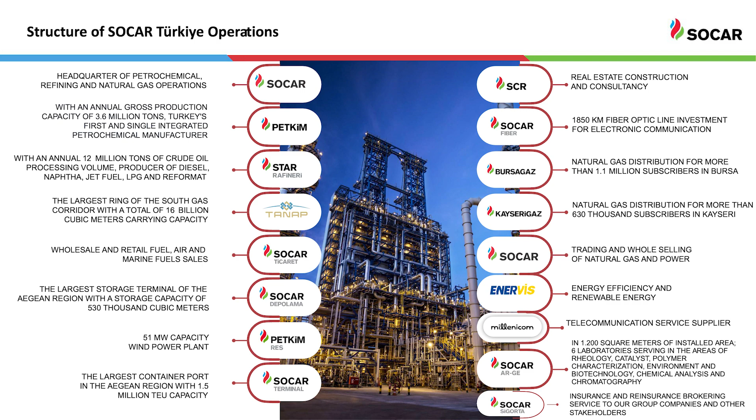I will give you shortly information about the SOCAR Türkiye operation. SOCAR Türkiye belongs to SOCAR, the State Oil Company of the Republic of Azerbaijan. Many investments in Turkey. Firstly, 18 company investments belong to SOCAR. Refinery and petrochemical sites are the largest, and the other largest is the pipeline and gas distribution, very big in Turkey.

Refinery and petrochemical sites are in Turkey in İzmir, Aliağa, the first integrated private energy zone investment in Turkey. You can see İzmir is a very famous city in Turkey. And the petrochemical site is approximately 55 years old. We have a production power of strategic importance to Turkey because it covers 12% of Turkey's capacity needs.

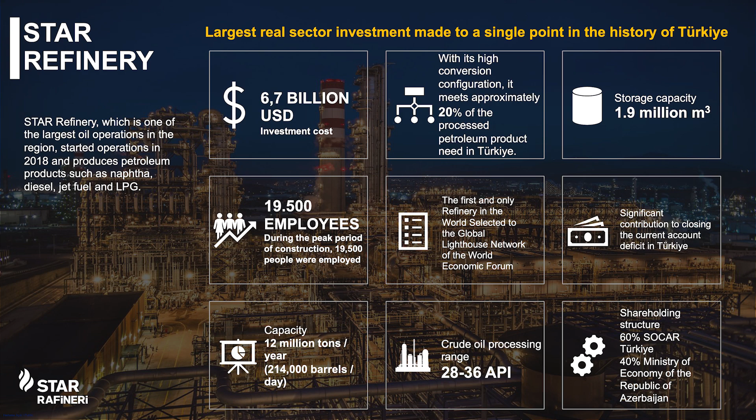After that, the new plant, STAR refinery, is the new plant established approximately 4 years ago. Capacity 12 million tons, a very big company in Turkey. And the other is SOCAR storage. Storage has the largest capacity storage terminal of the Aegean region in Turkey.

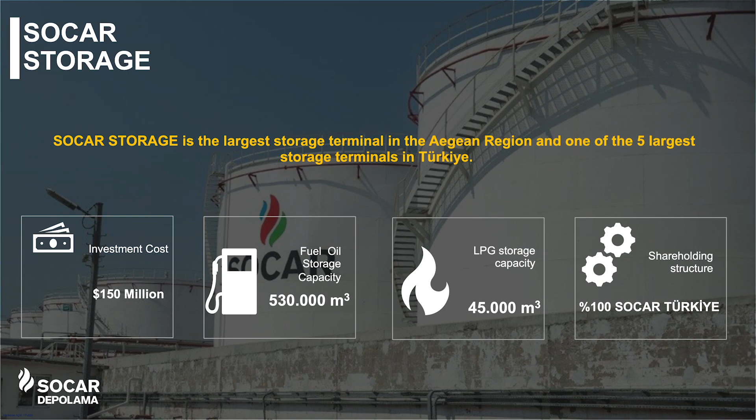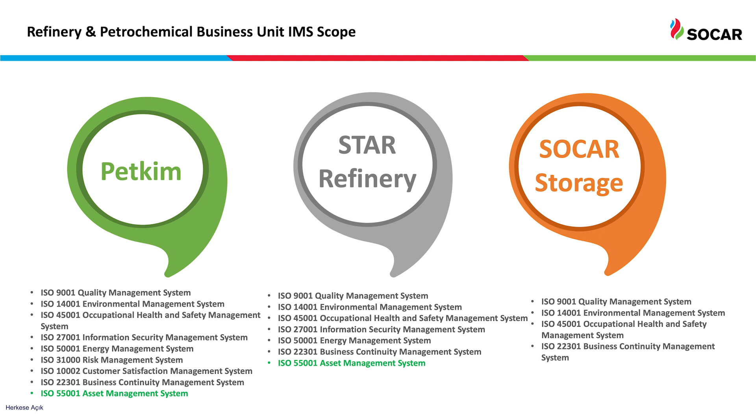For SOCAR Türkiye, quality system is very important. Therefore, you can see a lot of certifications. ISO asset management system, 2 years ago we got this certification.

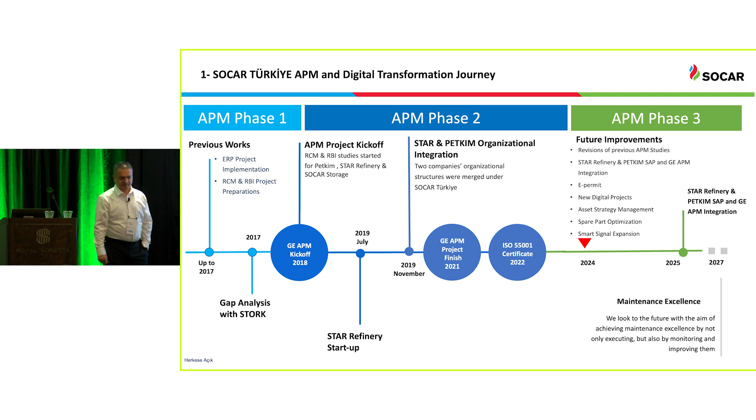Firstly, the transformation journey. The petrochemical site is very experienced, but unfortunately had a traditional maintenance mentality. Years ago, we did a gap analysis with Stork company. Stork, as you know, is a very big consultant company. After that we started the APM project, collaborating with GE and Stork together. STAR refinery started in 2019 in Turkey. After the STAR organizational integration, the refinery and petrochemical integrated the system, because belonging to SOCAR is very beneficial. So after finishing the project, 1 year later, we got ISO certification, very important.

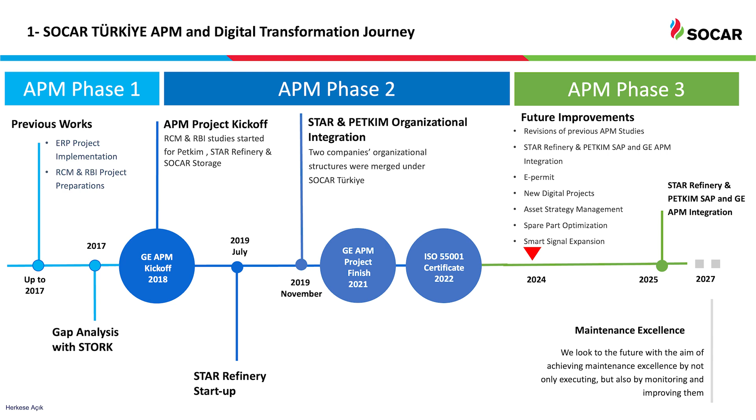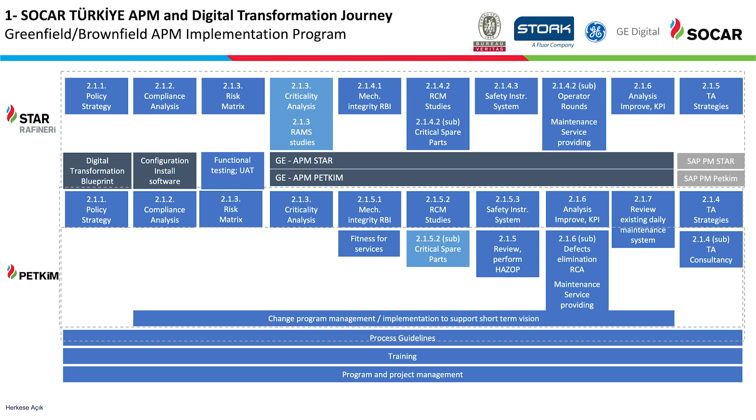APM phase 3 is the other. We started the project e-permit, APM integration this year, a new digital project, we have a lot of investment. Our project topics are generally STAR refinery and petrochemical site. You can see Stork, GE, and Veritas together. We started the project. The project is step by step. Firstly, creating policies, asset strategy, plan.

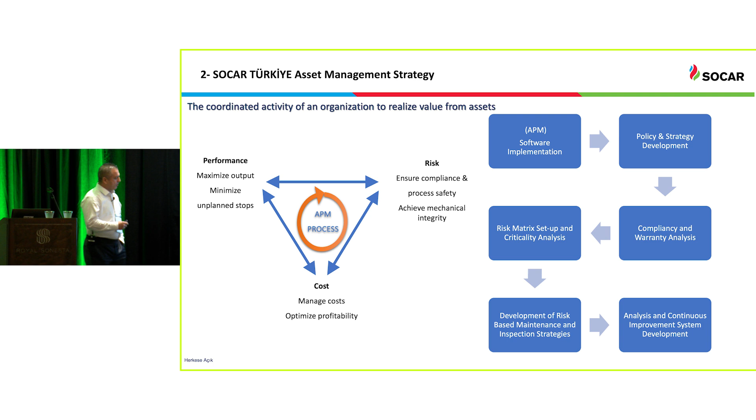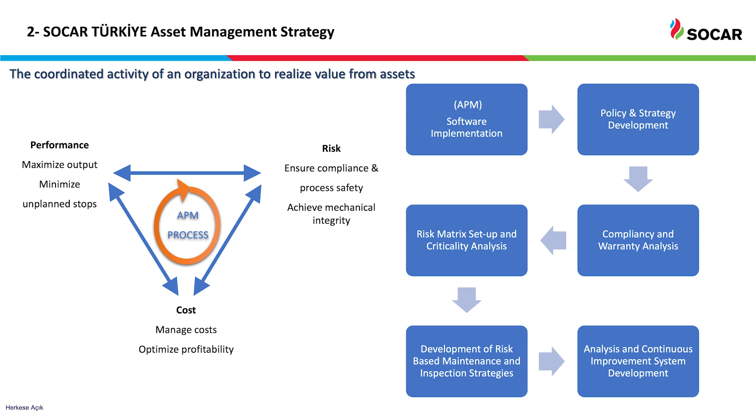The SOCAR asset management strategy is like a triangle, because of performance, risk, cost optimization balance. Very important. So cost is very important, but risk is very important. Performance maximizes output, but risk assessment is very important. This model is the SOCAR Türkiye asset strategy model. Asset strategy model, asset register, all in the SAP system: equipment, specification, all of them in the SAP system.

We started the criticality assessment. Criticality assessment according to compliance, very important regulation, international regulation and governance regulation. For criticality analysis, red is very high, orange is high, yellow is normal, and green is low. After the criticality analysis, for equipment with very high score, we started according to taxonomy type: RBI, safety instrumented system, RCM, different groups per project.

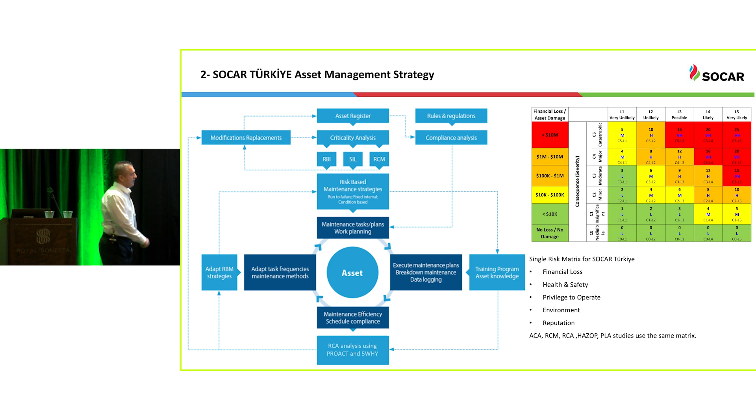After the result of the analysis, maintenance strategy: run to failure, vibration analysis, spare parts management and overall maintenance group. We defined the system. This one is the blue APM system. We use the APM system. After the asset strategy optimization, the asset strategy is implemented in the SAP system: maintenance task plan, working plan. SOCAR Türkiye's aim and purpose is continuous improvement.

So for continuous improvement: PM tasks and execution, maintenance plan and efficiency schedules, KPI and trend monitoring system. Root cause analysis using PROACT or 5 Whys. Plan the maintenance, execute, control with smart KPI monitoring, and act. The SOCAR Türkiye risk matrix has 5 items: financial, HSE, privilege to operate, environment, and reputation.

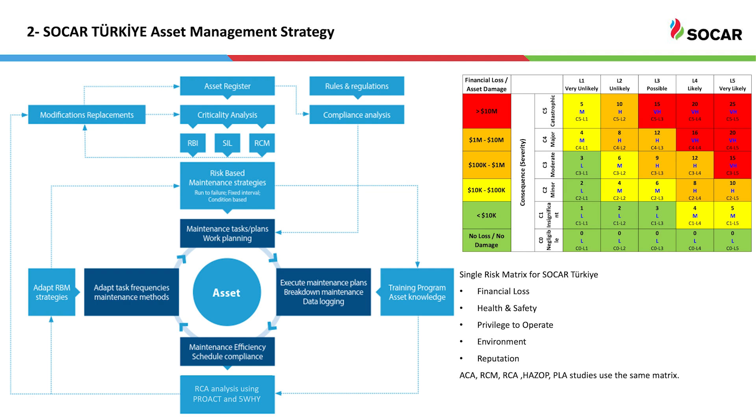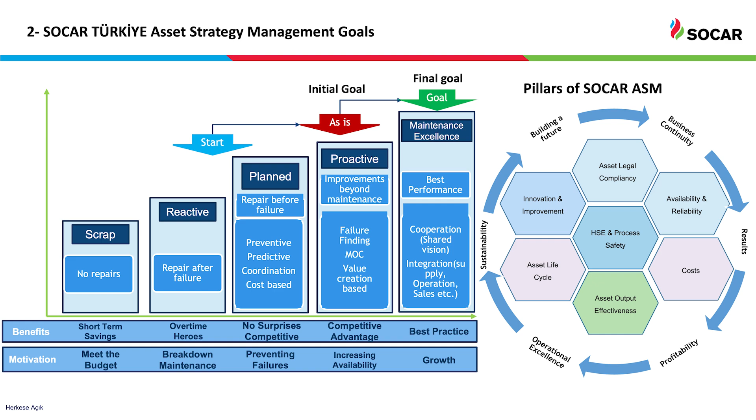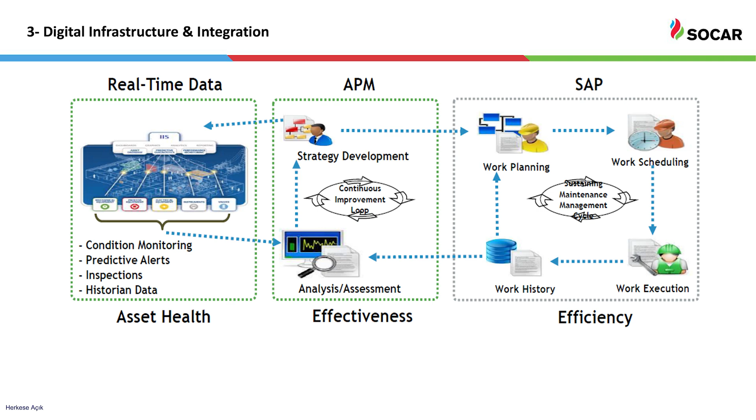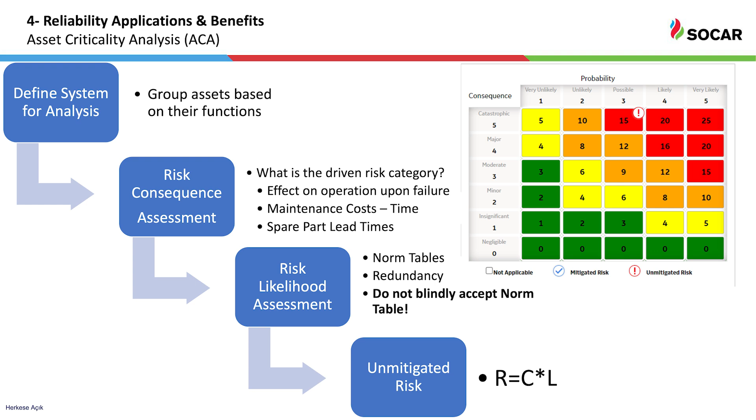A lot of data, a lot of knowledge. We manage it only with a digital system. APM is a very good system for us. This system we use to analyze everything. SAP system is, you know, the SAP system. In addition, other predictive maintenance and historian data integration, all systems with two-way integration. Asset criticality analysis step by step, as you know. After the asset score, the unmitigated risk score, we started the analysis.

Reliability RCM, very important, we started the RCM. Normally, for very high critical equipment a specific maintenance strategy is defined, with a specific period according to mean time between failure and reliability score, optimized care maintenance strategy. For low, it is basically operator rounds, generally done by the operation group. Base care and standard care is the maintenance group's responsibility.

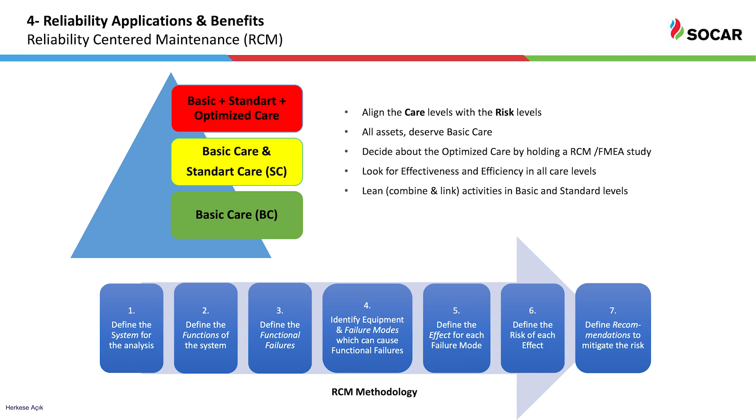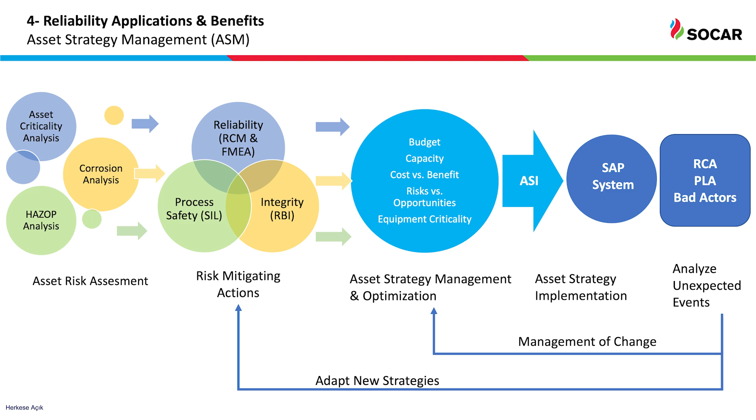This asset strategy workflow, as you know, has a lot of analysis: reliability, process safety, integrity analysis, optimization, and budget, capacity, cost benefit, risk, opportunity, equipment criticality, combined into the maintenance strategy. We defined only one strategy. After the asset strategy is implemented in the SAP system: work orders, PM work orders, root cause analysis, production loss analysis, bad actor analysis, unexpected events.

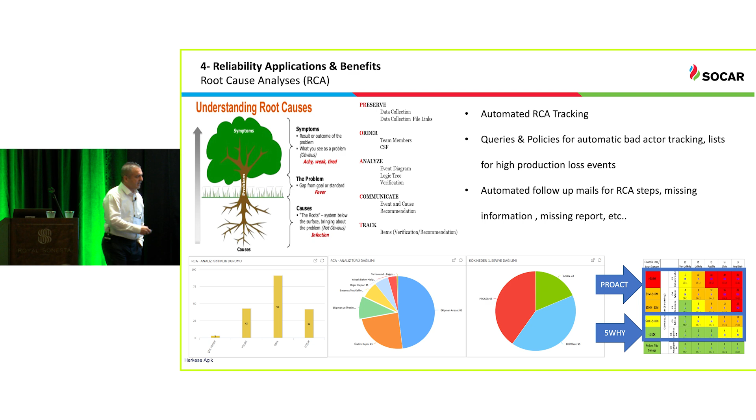For root cause analysis, we use the APM system. Normally, according to our procedure, risk analysis: every event we do the risk analysis, small or big, no difference. So if very high risk, with PROACT method, the responsibility is only the reliability group; moderate, the facilitator is only the reliability group. The other, small bad actors, the root cause responsibility is the maintenance group, operation group, or process group.

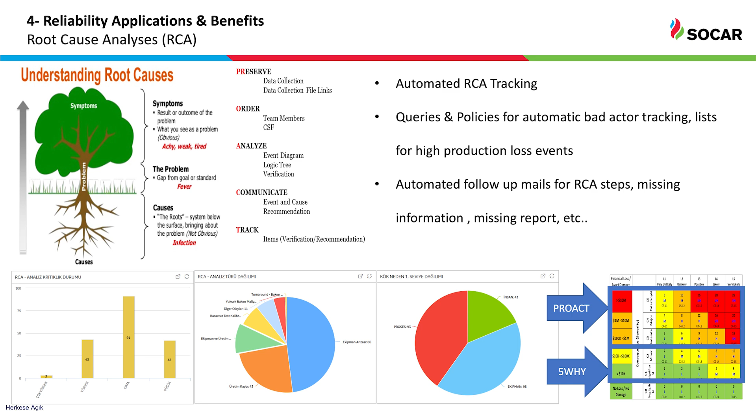Reliability, not only reliability RCM analysis, the other analysis. Sometimes it is the reliability, availability, maintainability, RAM analysis. Yesterday, GE explained the new improved development very well. So the real case: as you know, the integration of the refinery and petrochemical site. The Petkim site has 4 boilers, but 2 boilers working and the 3rd boiler standby.

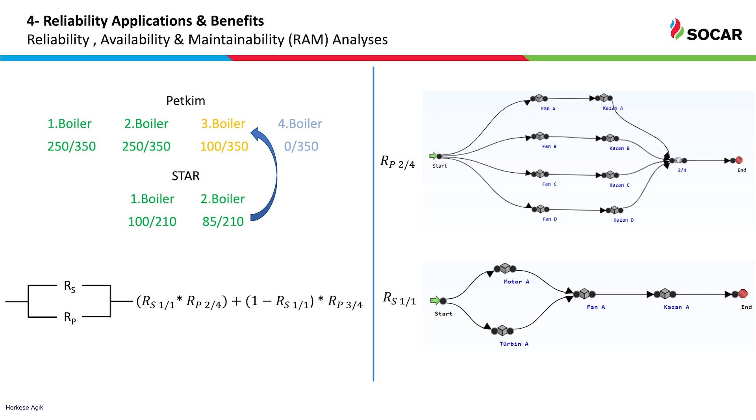The other overall maintenance, generally, mentality. The Star site has 2 boilers. 1 boiler is enough, boiler capacity is enough. The other is standby. So, firstly, reliability analysis. We started the reliability analysis. We used the GE APM solution Meridium.

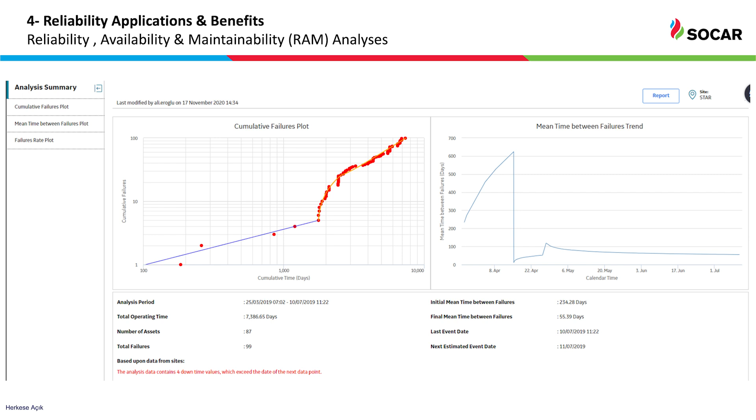Firstly, parallel system. After that we created a new scenario. After the scenario, the system is very good. So 2 boilers are enough, 1 boiler is standby. For the petrochemical site and refinery site, 1 standby is enough. So approximately $2 million per year.

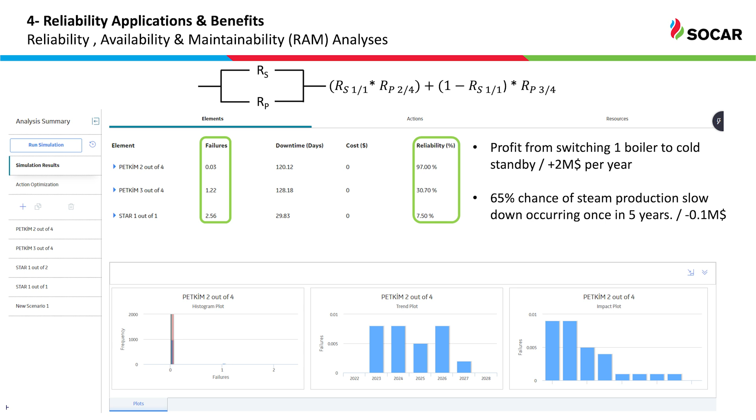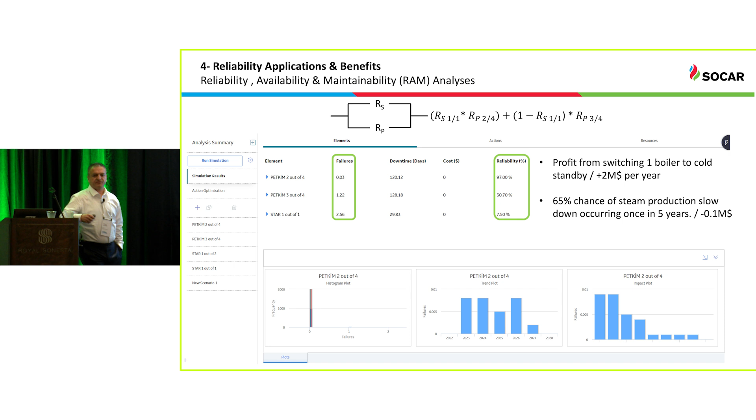This analysis result: at SOCAR, all project risk analysis and budget analysis and cost benefit analysis are done by the SOCAR financial department. If your project is feasible, we start. Asset life cycle cost analysis: we started to improve the asset life. LCC analysis, life cycle cost analysis, is very important.

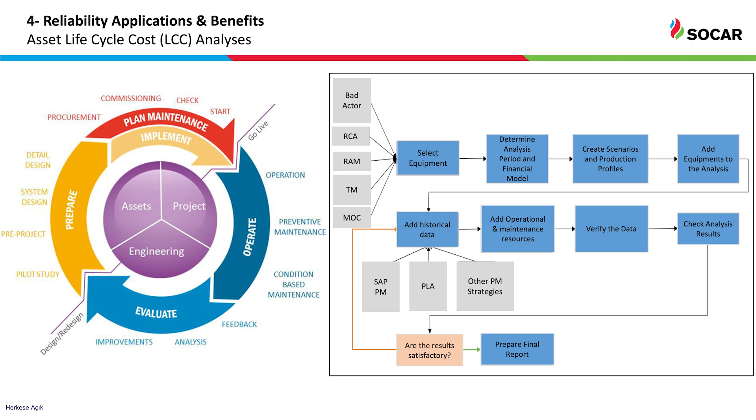As you know, equipment from design to obsolescence, scrap, we monitor the whole process. So we use the APM asset life solution. Our process has a lot of triggers: bad actor, root cause analysis, RAM, thickness monitoring, MOC, a lot of systems. We started the life cycle cost.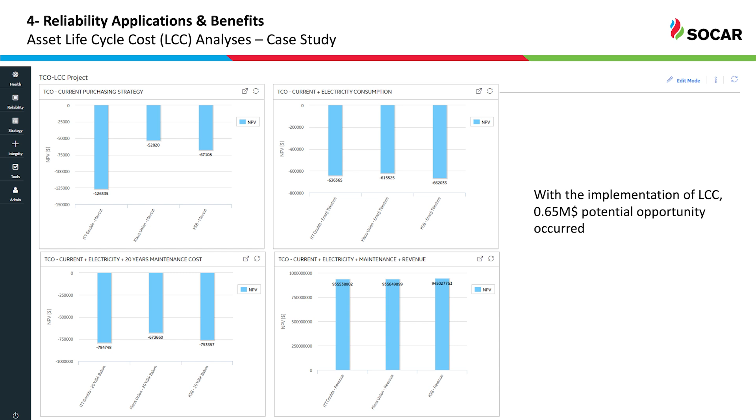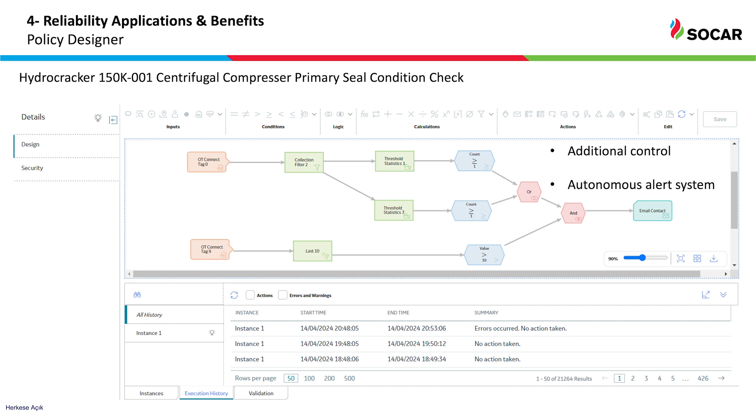Policy designer. Policy designer is not only for the RBI system, but other systems. SOCAR Türkiye uses all policy designer modules. Generally root cause, production loss, a lot of systems. For example, policy designer for the hydrocracker centrifugal compressor seal condition check. Production loss analysis we used; normally SOCAR uses all GE Meridium modules. Production loss analysis is very, very important. If production is lost, it goes directly to the root cause analysis module with the policy.

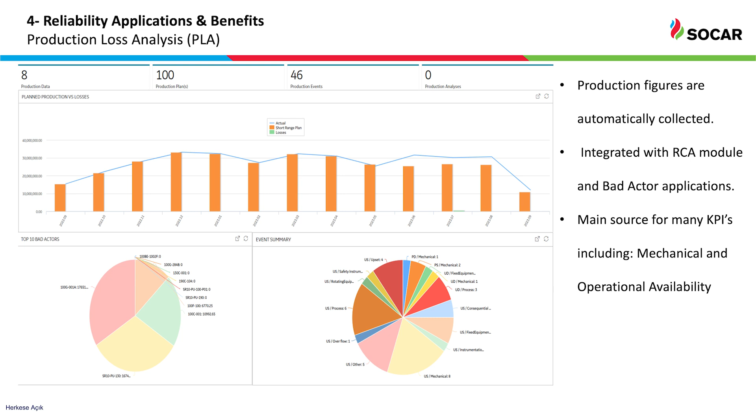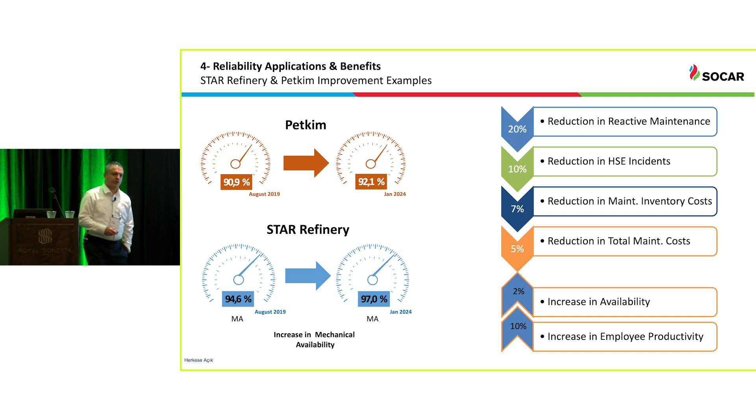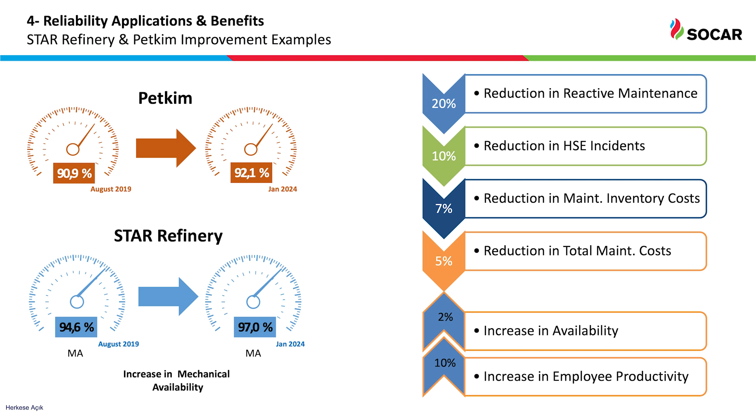APM is very important, but top management asks about the benefit. What is the benefit? Very high cost. But you can see the Petkim site availability, 90.9, 92.1 increase, over 4 years. The same with Star Refinery, 11 capacity, now 13 million capacity. Very high availability. And this one is reactive maintenance reduction, HSE reduction, inventory cost reduction, total maintenance cost reduction, increased availability, increased employee.

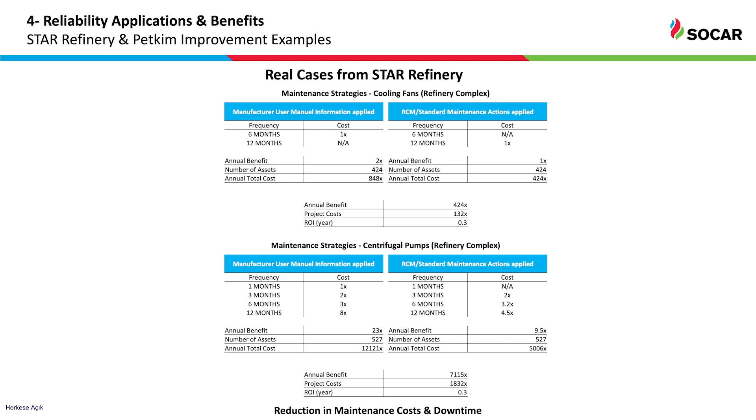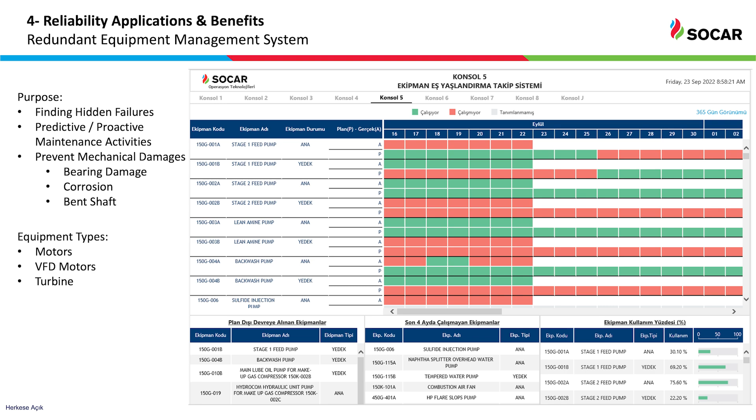Real case: the problem is normally not only the total system, sometimes equipment taxonomy, for example cooling fans and centrifugal pumps. You can see ROI benefit is very, very high. SOCAR Türkiye system designer, the redundant equipment management digital system. As you know, the main pump works 3 months, and the standby pump, according to procedure, 1 month. We check it after the report. They send the email to the responsible operation group or maintenance group: why is the main pump working? Why is standby not working?

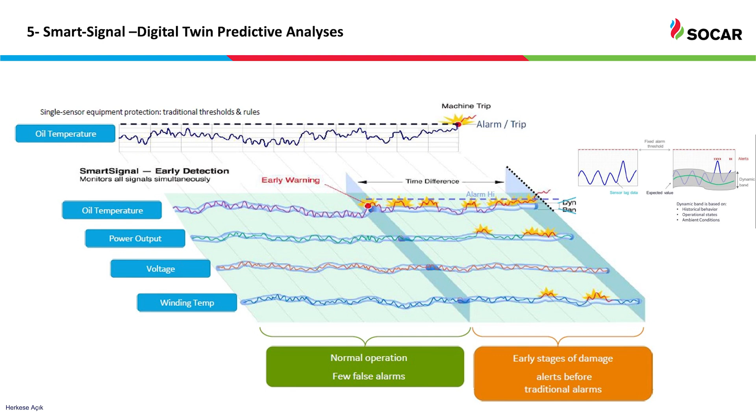Yes, SmartSignal twin. Approximately 2 years ago we started. As you know, yesterday GE very well explained SmartSignal and its improvement development. I think very, very good. We apply it. SOCAR Türkiye is very, very happy with SmartSignal. So we started the pilot with 5 equipment, but from the project benefit cost result, we decided on expansion. The first expansion was 13 pieces of equipment, and after that we expanded to the petrochemical site and other critical equipment.

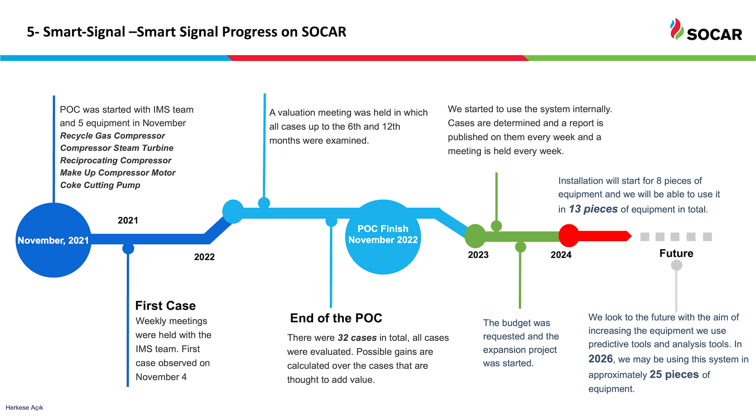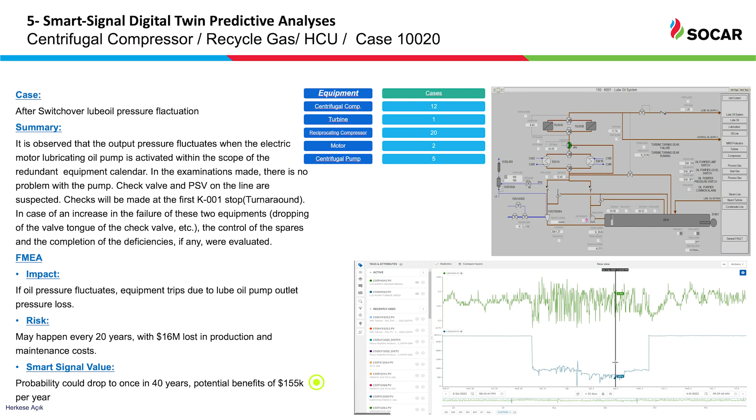You can see SmartSignal coverage, duration, alerts, open cases, meetings. Every alert is evaluated by the predictive maintenance department, and in meetings the operation group, if necessary the project group, and the maintenance group decide together. For example, a very critical centrifugal compressor, very early detection with SmartSignal. So failure mode effect analysis, impact and risk. We calculated the risk. SmartSignal value and potential benefits, you can see, $155,000.

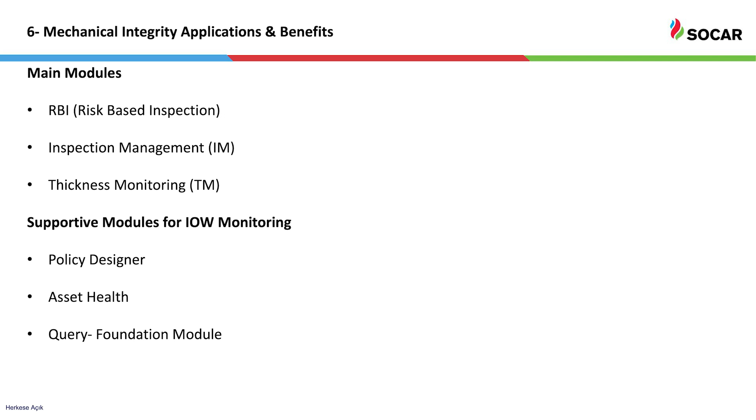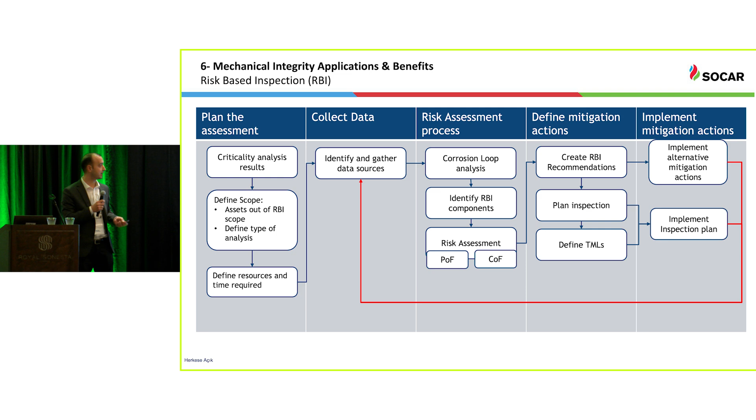Supportive modules for IOW monitoring we also use: policy designer, asset health and query foundation modules in Meridium. Mechanical integrity applications, risk-based inspections: plan assessment, collect data, risk assessment process, define mitigation actions, implement mitigation actions. Criticality analysis results, define scope, define resources and time required, collect data, identify data sources, corrosion analysis, identify RBI components, probability of failure and consequence of failure analysis, create RBI recommendations, define TMLs, implement mitigation actions. This is IOW, and implement inspection plan.

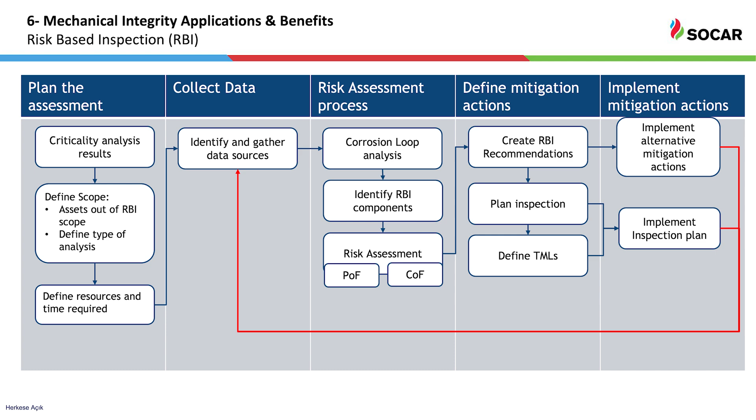This is our example of corrosion loops for the aromatic plant. We draw all of the corrosion loops in the P&ID and PFD, and we save these corrosion loops. If needed, we revise them.

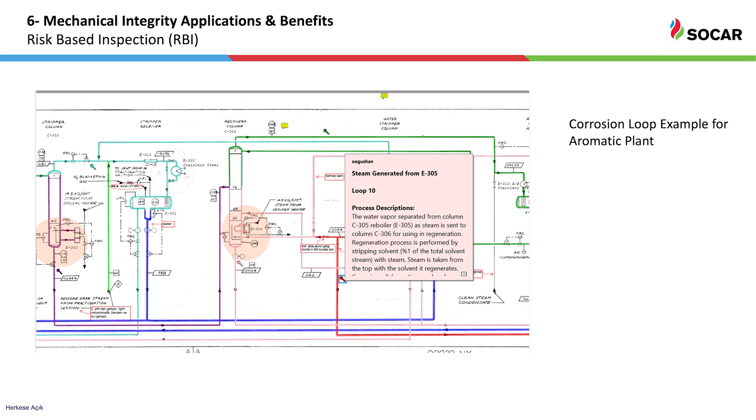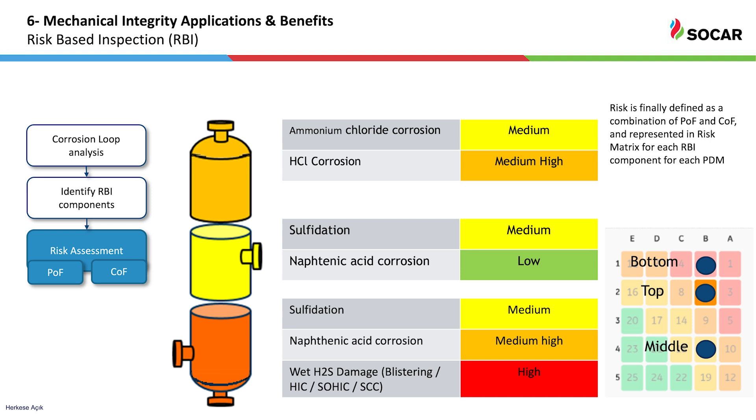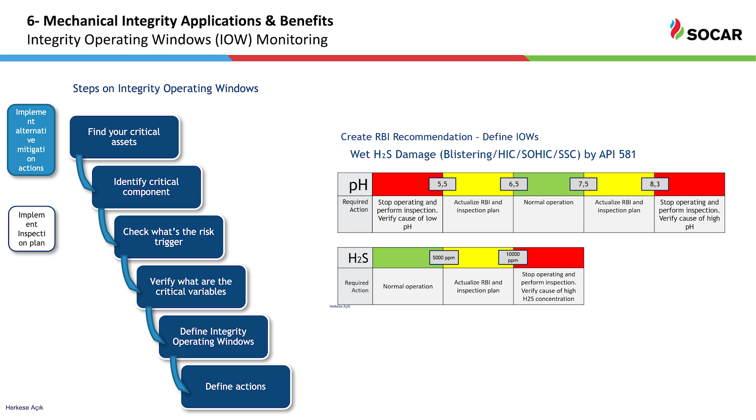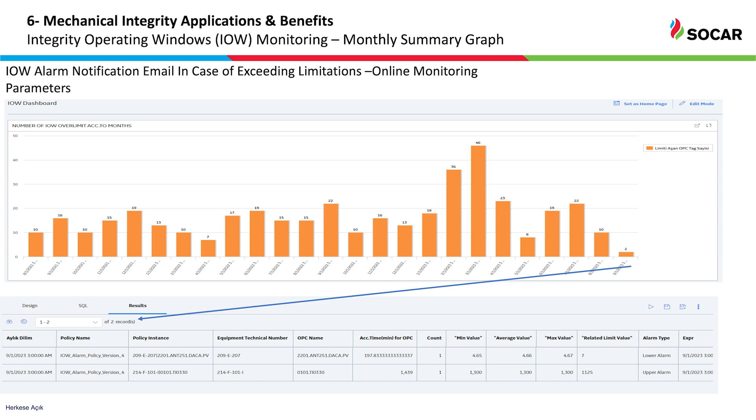We are dividing the equipment part by part and define the related corrosion damage mechanisms. In IOW monitoring, you can see our pH and H2S monitoring parameters. Between certain parameters, we are taking actions: stop operating, perform inspection, normal operation, or other actions. IOW alarm notifications are sent by email day by day, and we are screening these values in the dashboards every day.

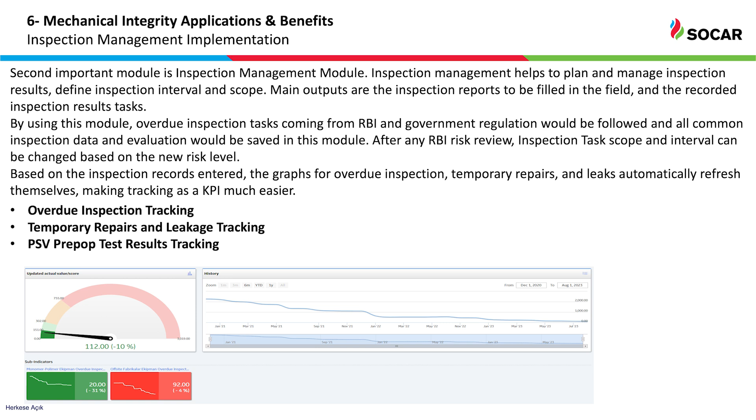The second important module is the inspection management module. Inspection management helps us to plan, manage inspection results, and define inspection interval and scope. Main outputs are the inspection reports to be filled in the field and recorded inspection results. Overdue inspection tracking, temporary repairs and leakage tracking, and PSV prepop test results tracking dashboards are our main dashboards.

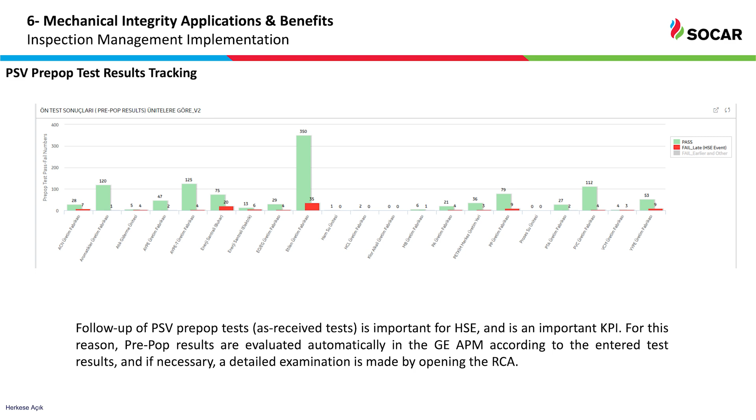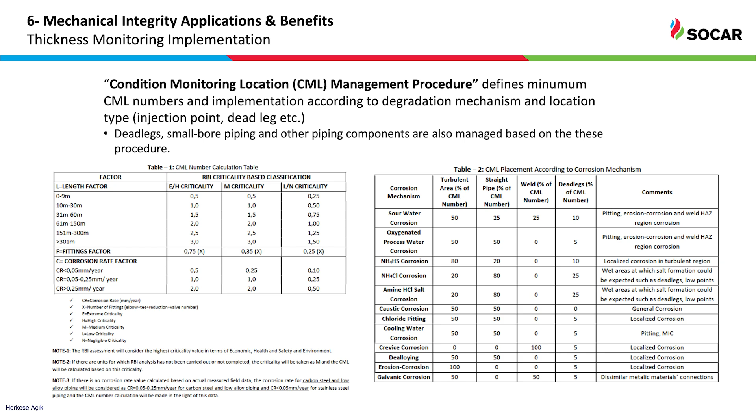This is the plant, and these are the overdue inspections dashboard values. Temporary repairs and leakage graphs according to the plans are also here. PSV prepop results are also tracked very closely. And we have condition monitoring locations management procedures. This procedure defines the minimum locations where we collect thickness measurements. TML, piping tag, and piping circuit numbers are also screened and monitored closely in the main dashboards in Meridium.

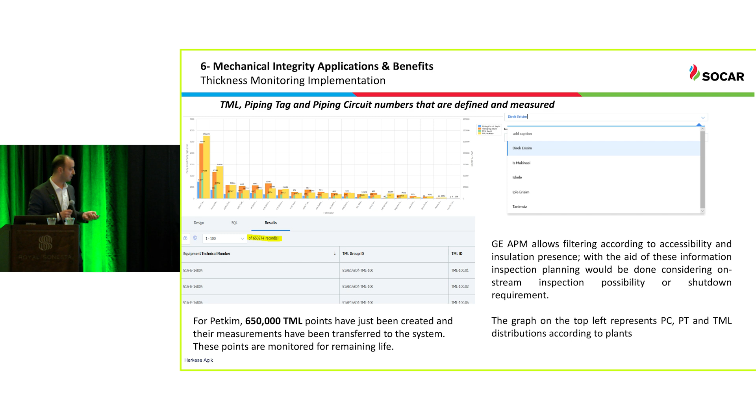For Petkim, 650,000 TML points have been created and their measurements have been transferred to the system. These points are monitored for remaining life, and these numbers are going up every day. GE APM allows filtering according to accessibility and insulation presence. With the aid of this information, inspection planning can be done considering on-stream inspection possibility or shutdown requirement. We are filtering these TMLs by their accessibility, insulation, temperature or pressure. By filtering these TMLs, we are planning their measurement time and measurement cost.

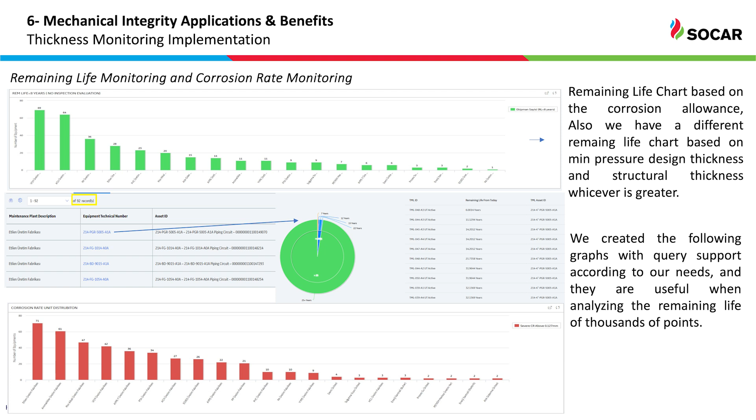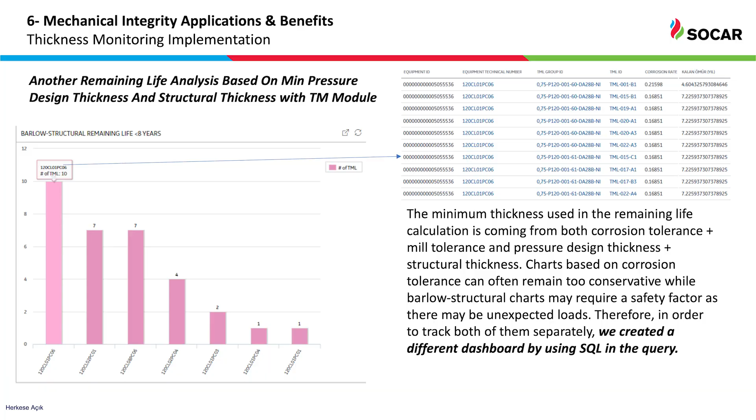And remaining life monitoring, corrosion rate monitoring. After evaluating TMLs, we have corrosion rates, and these corrosion rates are shown in this dashboard. Remaining life chart based on corrosion allowance. Also, we have a different remaining life chart based on minimum pressure design thickness and structural thickness, whichever is greater. And this is Barlow structural remaining life thickness locations screening.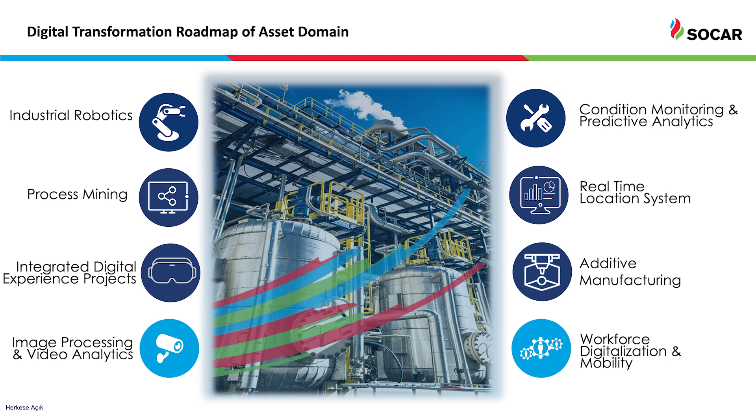As SOCAR Türkiye Digital Transformation Department, we are managing digital transformation projects with technical teams like Tamer Bey, Erkut Bey and other teams, as 8 different verticals. The most popular one is industrial robotics, physical robotics, and drones. We are using this technology in lots of projects. The second most popular one is image processing and video analytics, and integrated digital experience, which I will explain on the last slide. Condition monitoring and predictive analytics is the most critical vertical for us because SmartSignal and APM run here.

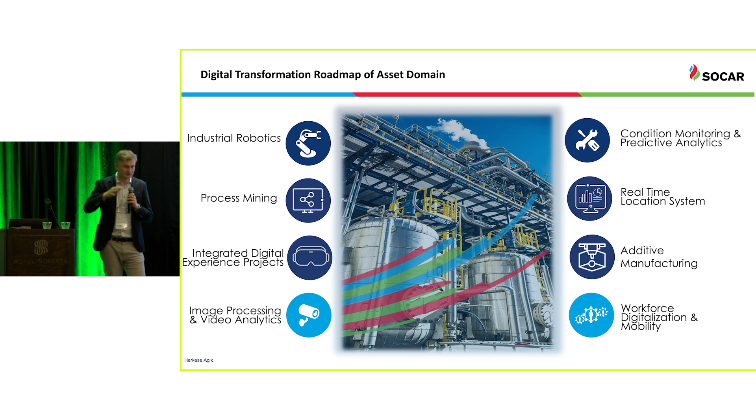And there are some HSE-based projects like RTLS, real-time location system. We are tracking people or vehicles. Video analytics projects are also based on HSE. Workforce digitalization and mobility includes electronic work permit and work manager projects. Our last and newest area is additive manufacturing. This year we made a pilot with metal 3D printing to replace our spare parts with newly produced additive ones. I will give some detail for some of them.

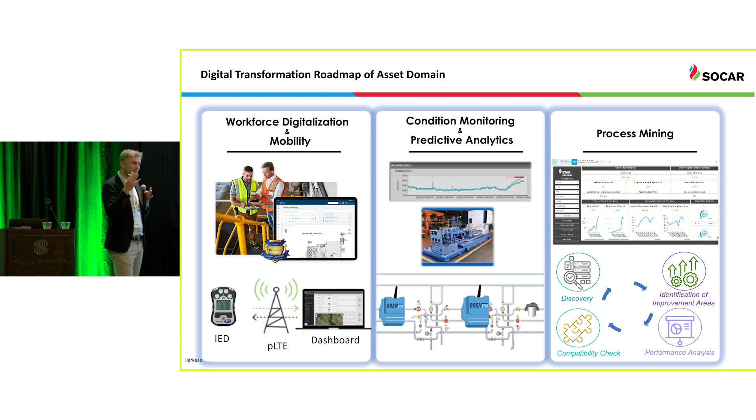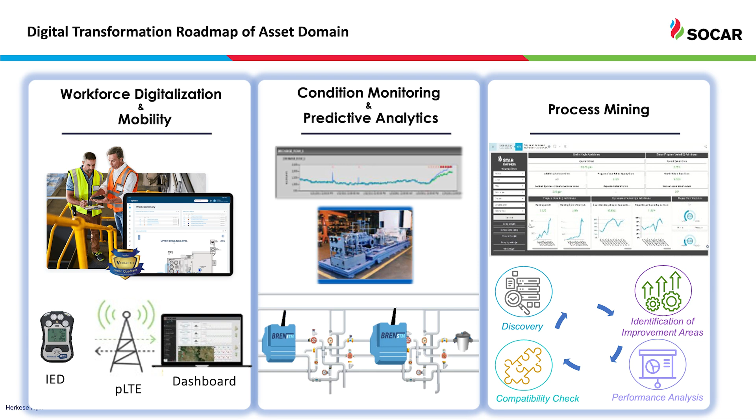On the workforce digitalization side, electronic work permit and work manager are very common projects that we use all over the site. How is it possible? It's possible with private LTE technology. We implemented this technology last year, and all the tablets and telephones communicate over private LTE. Communication is very important for this area. Like SmartSignal, we have lots of rotating equipment-based predictive analytics software and tools. There are also projects for static equipment, for example steam trap monitoring. And on the process mining side, we have an internal data team which collects data from site and creates value in different areas.

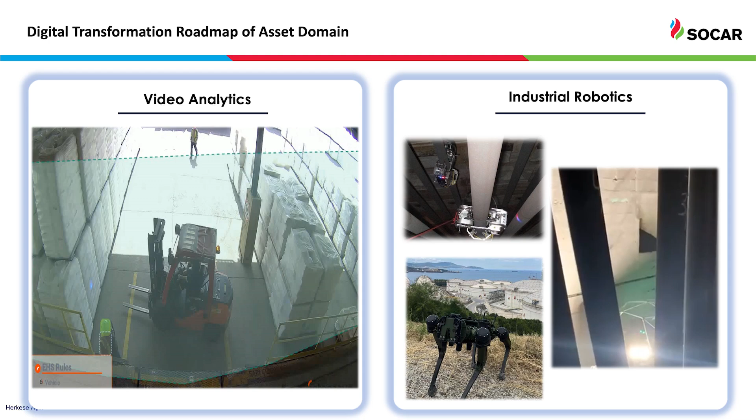And this is our legged robot. We are using it for security reasons. We made a pilot, but maybe after a year, we will use this kind of robot continuously on our site. All these technologies produce lots of data, and APM and Meridium are the most popular data processing tools for our daily operation.

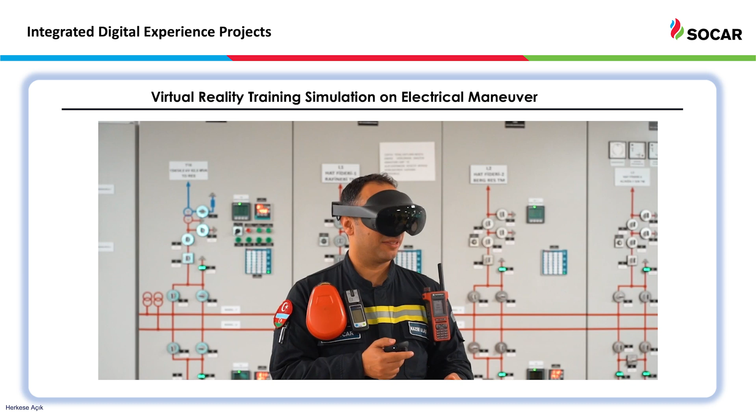This is a very new project for us. Electrical high voltage maneuvers are not very common, but your operator should be ready every time. When you face this bad situation, your operator should perform the operation without any fault. So we made a VR scenario, exactly the same as our site. Normally, our operators periodically read procedures, but now they practice periodically in VR. We think they are ready for this case and in an emergency they will not make a fault, and we are extending it with UPS maneuvers and other projects of this kind.